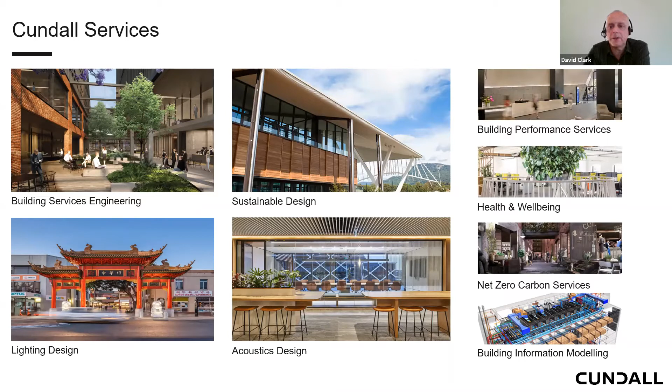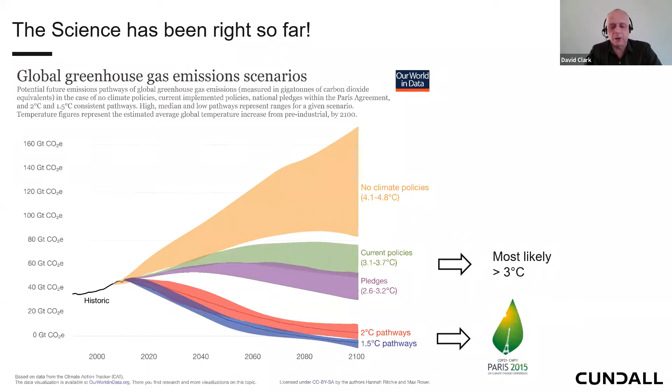So why is getting to zero carbon so important? Well, the science has been predicting where we would find ourselves for years. And while many have ignored this, it's been right so far, and there's been no signs really that we're flattening the curve, let alone making the dramatic cuts we need to achieve the Paris targets of 1.5 to 2 degrees C. Without significant change to business as usual, we're going to be sailing over the 3 degrees target in the next 50 years or so, and we're already experiencing what just 1 degree temperature rise looks like.

Most of us attending today are going to see this change during our lifetime, where we keep breaking historical climate records every year, where we're going to see 50-degree temperatures in Australian capital cities on a fairly regular basis. Buildings and communities are going to need to be designed to cope with more extreme temperatures, droughts, bushfires, storms and floods. And what we're seeing as a result of all this is communities are getting very concerned. There's a lot of community action, protests are increasing, and companies' reputations and social license to operate is going to be challenged like never before.

We're seeing investors and shareholders taking action. More and more companies are refusing to invest in fossil fuel projects and calling on boards to take climate action seriously. Many financiers, insurers and consultants have pulled out of their involvement in the Adani coal mine due to both community and investor pressure. This year the world's largest fund manager, BlackRock, said it would make climate change central to investment decisions. Although a lot of these things, words have possibly yet got to be translated into meaningful actions, I think the sentiment is there, and the movement is really starting to take hold.

Organisations around the world have set themselves zero carbon or science-based targets. And many are already significantly on the way to achieving zero carbon well before the 2030 or 2025 targets that they set themselves. And this includes many of Australia's leading property funds.

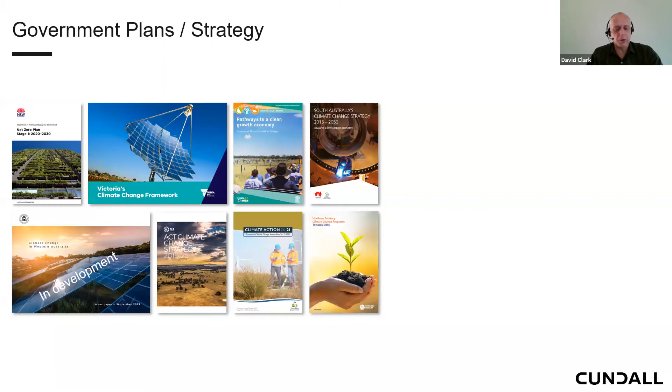All government states and territories in Australia have either committed to net zero carbon by 2050 or are working towards this. Obviously words need to be turned into action, but recognising the issue and then setting a goal is the first step to really tackling a problem. Unfortunately, the federal government has yet to really commit to this zero carbon future, and is still pinning the future prosperity of Australia really on coal and gas.

But as you've seen, there's such sentiment gathering pace with communities, with investors and with companies and leaders in this space, and the energy companies - despite that lack of action or commitment, the future is zero carbon, and we're seeing that more and more on the projects, and some of those will be evidenced today in our case studies.

So what is a zero carbon building? There's lots of definitions floating around, but ultimately it's looking at your scope 1, 2 and 3 emissions. In buildings, it's primarily your building energy. Where do you source your energy from? Taking fossil fuels out, such as gas boilers and so on, looking at your grid electricity and your network losses.

We're seeing more interest in embodied carbon. And then with building operations, things like water, waste and commuting, how you get to and from a building, are also increasingly becoming part of the zero carbon footprint.

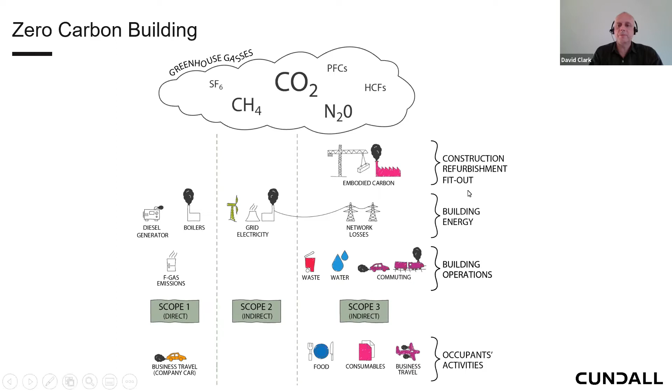So two key trends we're seeing emerging at the moment, in addition to the huge increase in renewable energy, is embodied carbon - placing that emphasis on the carbon footprint right at the start of the building project. We're starting to see this now influence the design of buildings, the specification of materials and the selection of products. And that in turn is influencing the supply chain to deliver lower carbon or zero carbon products for industry to use in buildings.

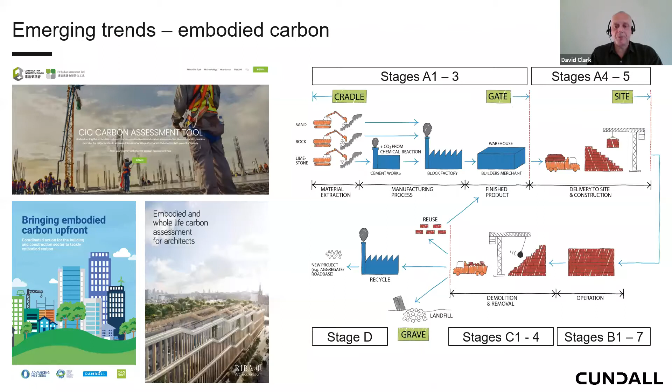There's lots of new tools being developed to make this easier for people to do. An example is the Hong Kong Carbon Assessment Tool, which Cundall wrote for the CIC, and that's been used on over 200 projects so far in the less than 12 months since that's been available.

Another key trend we're seeing is the electrification of buildings. What we're talking about primarily here is the shifting away from gas boilers to provide space heating and hot water, and moving to more electric heat pump solutions, which can then be powered by renewables.

Also, and this is a challenge particularly in retail at the moment, the shift from gas cooktops to induction cooktops. We're seeing this on a number of residential projects, and we're starting to see it more and more in major commercial kitchens, because induction cooktops are cleaner, they're safer, they put less pollutants into the kitchen area, and they put less heat into the space. So they just create more comfortable spaces.

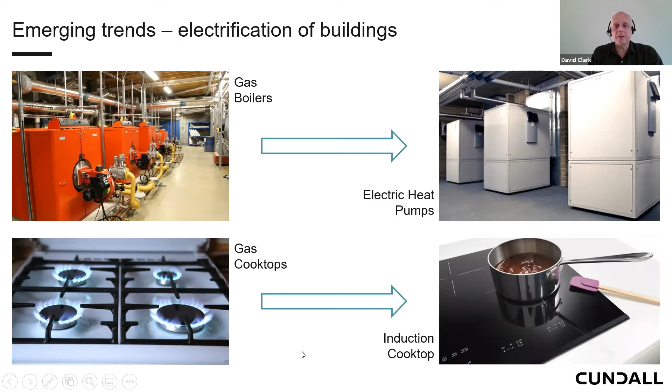This is now being recognised in the new Green Star tool. So for those of you that aren't aware, there's a new Green Star buildings rating tool coming out. It's been the biggest overhaul of the tool since it first came out 17 years ago. And one of the key planks of that tool is around net zero carbon.

When it comes out at the end of October, all 6-star buildings will need to be net zero carbon in operation. Then from any buildings registering after 2023, a 5-star building needs to be net zero. And if you register after 2026, all Green Star rated buildings will need to be net zero carbon in operation. This is in accordance with the Green Building Council's zero carbon pathway.

Zero carbon within the new tool is covered in a number of ways: the upfront carbon emissions, which is the embodied carbon - you've got to be highly efficient in your energy consumption. You can't use fossil fuels in the building. So if you want a 6-star building under the new tool, you won't be able to put natural gas for heating and cooking and domestic hot water.

All the electricity needs to come from renewable sources, either on-site or off-site, and then looking at other carbon sources and how those are dealt with and how those are offset. So we're starting to see this real shift now in how we design buildings and the level of ambition that you need to deliver Green Star buildings.

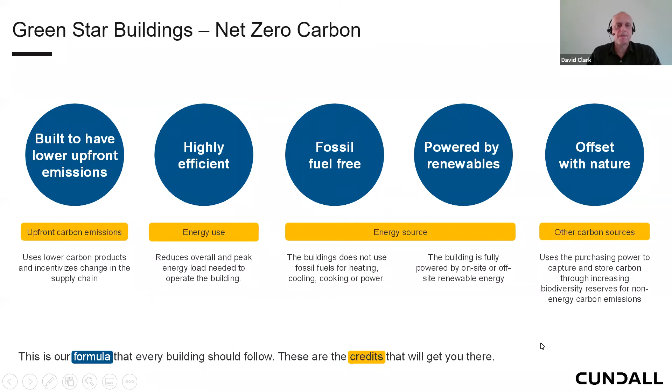So that's a brief introduction to zero carbon and the topic we're going to be talking about today. Now it gives me great pleasure to introduce today's speakers, who will present case studies of zero carbon projects covering new and existing buildings and a wide range of sectors. We've got education, retail, office, residential and mixed use projects covered today.

David Collins leads our Brisbane office, and will talk about the Sustainable Building Research Centre at the University of Wollongong, which is a zero carbon building and Australia's first and currently only Living Building Challenge certified project. He'll be followed by Andrew Thompson, who heads up the sustainability team in Melbourne, and will present on Frasers Property Burwood Brickworks, which is set to become the second Living Building Challenge project.

And is also zero carbon. Julian Bott is a director based in Sydney, and will discuss Stockland's M Park Building A, which is a new office building aiming to be certified carbon neutral, and which was also a pilot project informing the development of the new Green Star tool.

Oliver Grimaldi heads our Perth office and will present on Montreal Commons, a residential project in Fremantle which uses the One Planet framework to set a wide range of sustainability goals, including zero carbon. Cayman McCabe, a director in Melbourne, will present on Younghusband Woolstores, a mixed-use redevelopment of an existing heritage building, showing that zero carbon isn't just confined to new buildings. And Madeline Janash, also based in Perth, will provide an overview of the government's Climate Active Carbon Neutral certification scheme, which can be used for buildings, precincts, products, and organisations.

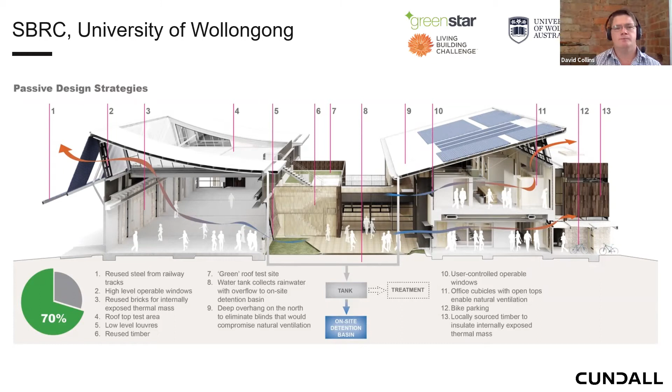Passive strategies were implemented around the building to reduce heat loads and allow natural ventilation, including ventilated openings at high levels that are occupant controlled, and good shading, particularly on the north, which also eliminated the need for blinds and helped daylighting. One of my favourite elements is that the office cubicles, provided for security and visual privacy, have an open top. Not great from an acoustic privacy point of view, but that wasn't something we felt was needed for this project. The open top allows natural ventilation to continue even into a small office cubicle. Appropriate use of materials was also applied throughout to ensure lower thermal loads.

Looking at energy use on site, lighting is very efficient, but heating and cooling systems are still used when needed - we still need to heat and cool occasionally. Hydronic in-slab floor heating has been used, along with ground-sourced heat pumps with user-controlled vents. We looked at the best efficiency systems we could use, and made sure occupants know how to control that space effectively.

Then it comes down to the energy generation on site. The building includes a 160 kilowatt solar system made up of different types of solar systems. As I mentioned, it's really a teaching space, and all these systems are metered and monitored separately to allow students to look at the energy data and compare the different systems.

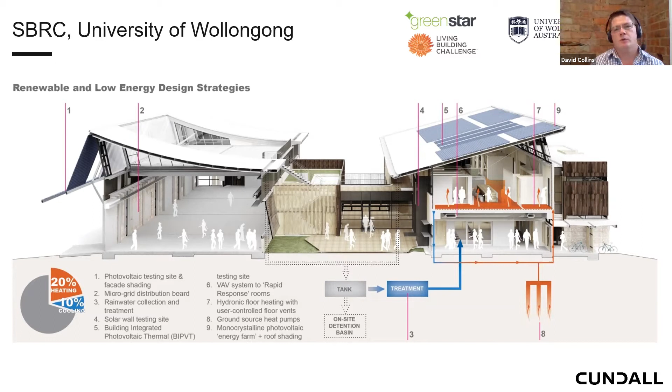We have a main monocrystalline energy farm on the big piece of roof on the right. There's also building integrated photovoltaics in the skylight, allowing both energy generation and the skylight function. There are facade shading elements with a dual purpose of generating electricity and shading the building, plus a solar wall, so students can research what different orientations and directions of solar panels can do for generation.

The building has been operating for a fair few years now, and happily it's been achieving net zero energy throughout that time. For any energy modelers listening, one of the big things with a university type building is understanding the load. A lot of modeling was done to try and predict the energy loads, and happily our safety factors were in the right magnitude—we've been 15% under those predictions throughout generation, which has been great.

The hard thing to predict is the different amount of consumption in different months. We got a fair balance working there, and it turned out successfully. Energy generation has been fairly well where we expected it to be.

Obviously it's fairly easy to predict solar generation, and happily nearly every month, bar a few very minor ones, we've generated more electricity on site than the building has used. The rest has been exported to the university campus—actually about 40% of the generation is being exported at the moment.

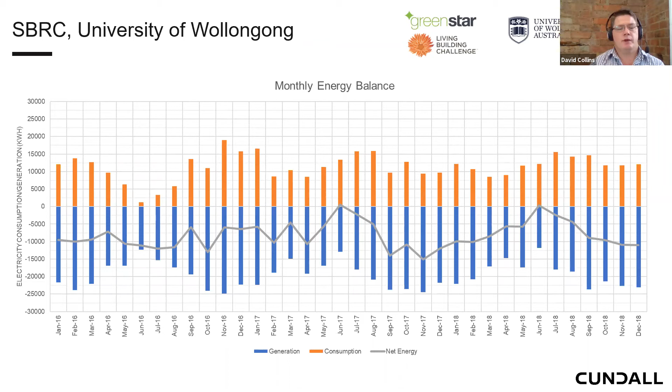That's just a summary of one of Australia's first carbon neutral buildings, a very proud project of Cundall's, and I'm sure of the rest of the project team. I'm going to hand over to Andrew Thompson now, who's going to talk about the Burwood Brickworks project, which is also aiming to be the second living building in Australia. Thank you.

Fantastic, thanks Dave. It's my great pleasure to talk to you today about the Burwood Brickworks, a Frasers Property retail centre in the middle ring eastern suburbs of Melbourne, designed by NH Architecture. It's approximately 13,000 square metres of leasable area, anchored with a Woolworths supermarket, Dan Murphy's bottle shop, cinema, childcare centre, medical centre, and about 40 specialist retailers.

As you can see in the image, the small matter of a rooftop urban farm is one of the more notable features of the building, and a fantastic place to visit if you ever get the chance. There's a restaurant up there as well, so you can sample all the produce.

The brief we were given on this project was very easy to say, slightly tougher to deliver: to produce the world's most sustainable retail centre, if not the world's most sustainable building. To demonstrate those credentials, as David Collins mentioned at the start, this is hopefully going to become the second Living Building Challenge certified project in Australia sometime in 2021.

It's also going to be a 6-star certified Green Star building, and it's of course located within a 6-star certified Green Star community as well. So all of the labels are there to certify what was done.

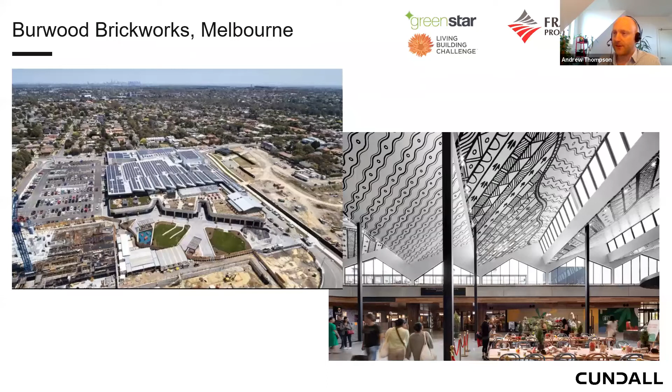Now they can buy into the power purchasing agreement. However, if they choose not to - they currently all do - but if any tenants were to choose to buy their own power, Frasers have additionally committed to still offset all of their emissions irrespective of where their tenants source the power. So irrespective of what happens in future in terms of energy contracts, all of the power will continue to be offset.

Now, as we mentioned, embodied carbon is becoming ever more important. As buildings get more efficient, more and more of our carbon gets associated with what's trapped in the bricks and the steel and the concrete that go in initially. So as part of Living Building Challenge, this project will offset all of those emissions associated with the materials. That's done through carbon offsetting approved by the International Living Future Institute, so it's highly credible offsetting.

But as with any kind of offsetting, you want to drive down the amount you have to offset from the start, and there's a series of fantastic initiatives in this project to do that. First of all, 67% of the materials budget was spent within Australia, which is not standard for a retail centre. There were some items that simply couldn't be practically sourced within Australia, but 67% of all materials were sourced locally to reduce the carbon emissions of transportation.

There are, of course, lots of recycled content in there in terms of Portland cement replacement, etc. There's also replacement of materials with less carbon intensive ones, such as using timber where possible instead of steel and concrete. But where it really got into some great stories was where it used salvage materials.

There was a requirement to use approximately 30 salvage materials, but they actually installed 87 different types. Those range from some things with great stories attached to them, like the bricks. It is a brickworks - Frasers actually managed to track down bricks that came from this very site, including, I believe, some from the 1956 Melbourne Olympics, which they managed to get hold of. Those have all been put back in, and some stories have been added to that. You can see some of the elements added to those bricks, and that's a feature wall at the centre now.

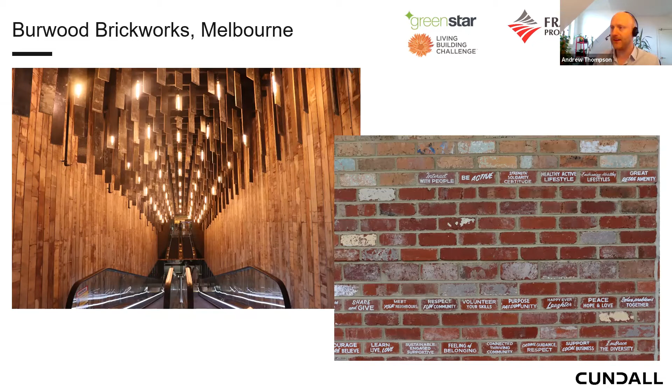We seem to have lost Julian at the critical moment. Sorry, I had an internet connection issue. Thank you, Dave and Andrew.

So, on to Stockland M Park. This is a new office development by Stockland, the first of four buildings located in Macquarie Park. It's been designed and tendered, with the award to be announced shortly, and should be constructed by early 2022. It's designed by Danish architects 3XN, with a strong focus on passive design and an optimised facade compliant with the new NCC 2019.

Our role has been ESD consultant for the design stage, covering Green Star, NABERS, and the carbon neutral strategy. Stockland has taken the initiative to design this building to be carbon neutral now as part of their ongoing commitment, to show it's feasible given that the building systems will be operational long beyond when Stockland's committing to those targets. The building will be finished in 2022, but all the systems will operate for many years beyond that. I believe the team has delivered all of that within the constraints of the project overall.

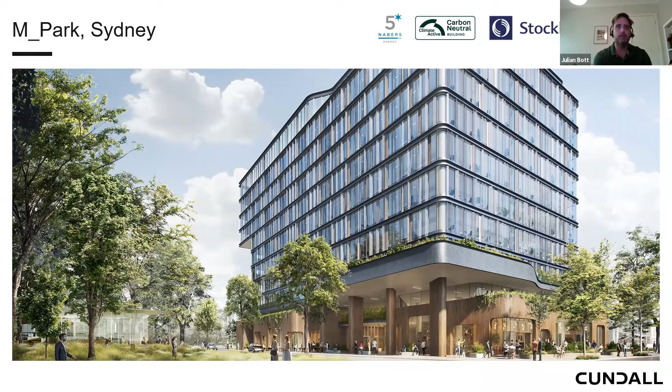Key initiatives for the project include participating in the early Green Star Future Focus Early Access Program to test new credits, particularly how designing a carbon neutral, all-electric building can work. It's targeting a 5-star Green Star rating under the existing V1.3 tool and a 5-star NABERS energy commitment agreement, although the building is actually designed to be capable of 5.5 stars.

It's a fossil-free, all-electric building, meaning it has no gas main, and all systems that would have been on gas are now all electric. The gas boilers and domestic hot water are replaced by air-sourced heat pumps providing heating and domestic hot water. There's also a large PV system covering most of the available roof space, contributing to on-site renewable energy.

That sets the building up to be all electric, meaning it can be powered by 100% renewable energy. All those elements come together to make the building easily certified as Climate Active carbon neutral, minimising the requirements for ongoing carbon offsets, limiting them to things you can't easily address, such as water, waste, and refrigerants. Those will be offset, making the building carbon neutral overall.

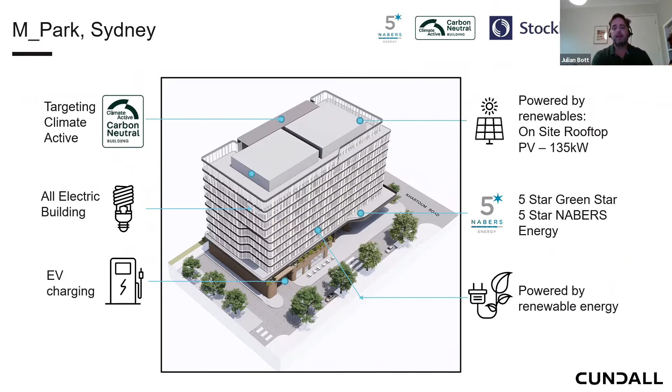All of that has been pulled together and delivered and tendered within the tolerances of the building requirements and brief—a great outcome to drive the industry forward as a leading example of what we can be doing now, accelerating the transition to carbon neutral operation. The building will be finished in 2022 and should be a leading example of how an office building can be designed and operated as carbon neutral.

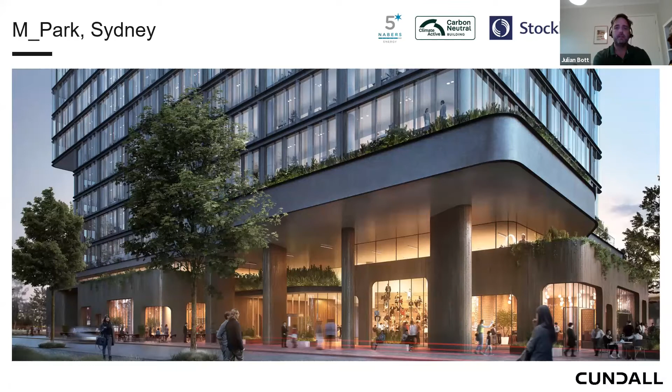Good afternoon to everyone dialing in from across Australia and across the world, from me in Perth, Western Australia. From an office building to a residential building, I'm really pleased to be talking about this one: Montreal Commons in Fremantle, just south of Perth. It's a multi-residential apartment building being developed in the Knutsford precinct, one of three lots on the precinct, and the way it's sharing its utilities and community groups makes it particularly unique and quite encouraging.

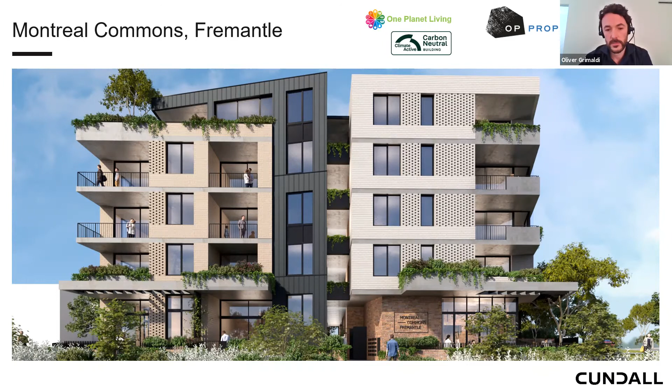The building is targeting carbon neutral status and also formal One Planet Living recognition. I'm pleased to say I think this project will be a bit of a game changer in the industry, in fact.

So it is targeting One Planet Living. Typically, a lot of these One Planet Living buildings, because there's 10 principles, may be strong in one or two of them, but I'd suggest that this building is fairly strong across all 10, particularly the zero carbon energy principle.

We've been liaising with Bioregional Australia and have had encouraging feedback from them. The One Planet Living recognition will include ongoing annual reviews to ensure the publicly released One Planet Action Plan is actually implemented for its occupants.

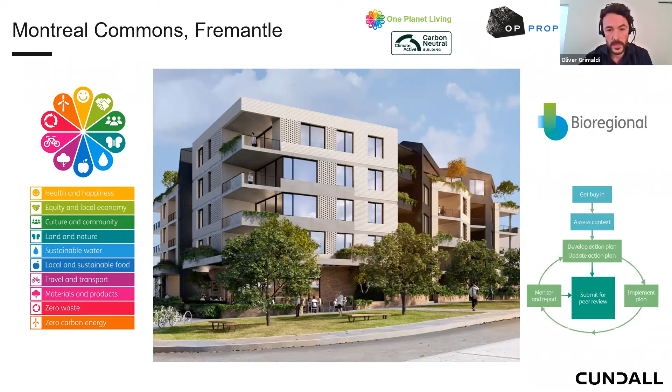So what makes this building particularly unique and special? Well, a fairly common theme at the moment, it's an all-electric building. There is no gas to the building. There are 75 kilowatts of developer-funded rooftop solar PV. But there's also a communal battery, a 670 kilowatt hour communal battery, which sits on lot 2, and that's being shared across the lot.

So the building will be utilizing blockchain technology within an embedded network through Power Ledger's platform. And the whole precinct is estimated to reduce carbon emissions by about 240 tons per year, which equates to about 6 tons per apartment.

On top of that, all of the top-up purchased grid electricity will be certified green power through a local retailer here, Change Energy. And all of this is equating to about a 50% reduction in strata levies for everybody, showing that sustainability is financially feasible and beneficial for everybody.

All the car parks have the possibility to be connected to EV charging car bays. On top of that, there's a communal bore, which you can see at the top there, providing all of the precinct's irrigation water. The pumping of that communal bore is actually powered by the green power, the PV, the battery, etc. So again, you've got carbon neutral or net zero bore water.

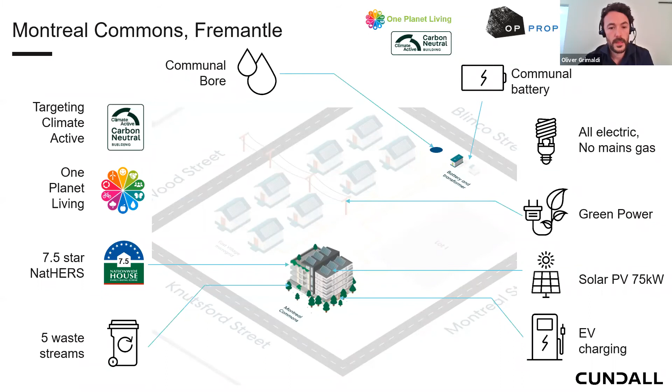And the building is gaining lots of media coverage. There are media outlets across the world and within Australia. I think even Russia and Korea are covering this building. So as I say, a real game changer for our industry, and I'm glad I got to talk about it today. So that's it from me.

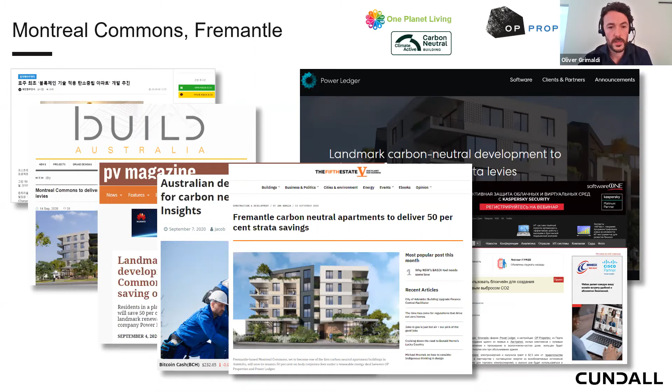House, but I'm presenting on... Oh, sorry, I'm muted. Nope. I'm presenting on the Younghusband project, which is, I suppose, a collection of buildings centered around a wool store.

That was built in 1906, so very much part of Australia's history, although it's actually not on the Victorian Heritage Register. It's only on the building of significance list as we speak, which came as a bit of a surprise to the development team. It's located about 20 minutes from the airport and about 2.5 kilometers from the Melbourne CBD. Importantly, it's also about 5 to 10 minutes away from 2 rail stations, and will be about 800 meters away from the new metro station at Arden once it's built.

The background of this is that Impact Investment Group, a B Corp certified company, acquired the site after a failed attempt by a previous developer to essentially build high-rise residential, keeping the shell of the original building with little other retention of it.

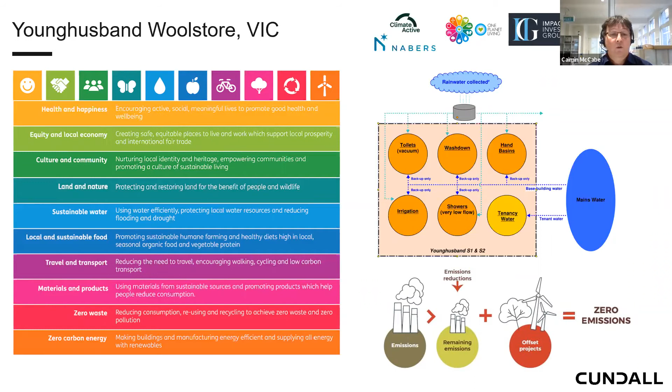So that's where it's going. Hopefully it will get delivered and achieve its aspirations, but it did demonstrate the pathway towards taking an existing building and achieving that net zero outcome. I'll leave it there and pass over to Madlen, who will talk to you about Climate Active.

Thank you, Caimin. So I will say a few words about the Climate Active Carbon Neutral certifications. Some of you probably know the NCOS scheme administered by the Australian government, and Climate Active is a rebranded version of this.

It comes as a certification, but it's also a standard, and the standard can be used by everyone. It's also free, available on the internet. If you follow the standard, you can then have a formal certification followed through.

Both the standard and the certification are available for buildings, and we've seen some examples in the presentation earlier today. You can also go wider than that and certify a whole precinct. But then Climate Active goes beyond this, certifying also organizations, events, products and services.

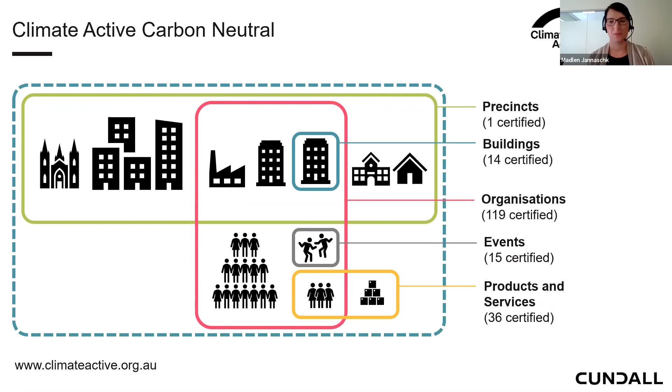This slide on one hand shows how to certify with Climate Active, but it also is a summary of what we talked about before. So what you see in that black box there is really a summary of how to go carbon neutral and how to become net zero.

There are 3 steps. Firstly, calculating the carbon footprint. You can only reduce and minimize what you know, so calculation is very important, and ideally following a set standard or guidance is recommended.

I should also mention that Climate Active only looks at operational emissions and real data emissions, so basically based on actual data on actual energy consumption. But that shouldn't stop you from calculating a footprint for a building that's planned or in design phase, because you can also calculate a footprint through modeling or through life cycle assessments.

Second step then is the reduction of the carbon footprint, so trying to get this as low as possible, and we've seen again a lot of examples how to do that in the presentation today. I think for buildings I can summarize the major initiatives to do that under 4 different measures.

Firstly would be the reduction of the demand in the first place, that's mainly through passive design. Secondly, efficiency, trying to get the HVAC systems, electricity systems, all the building services as efficient as possible. Then switching fuel, so no gas in the building. And then lastly, having as many on-site renewable energy as possible.

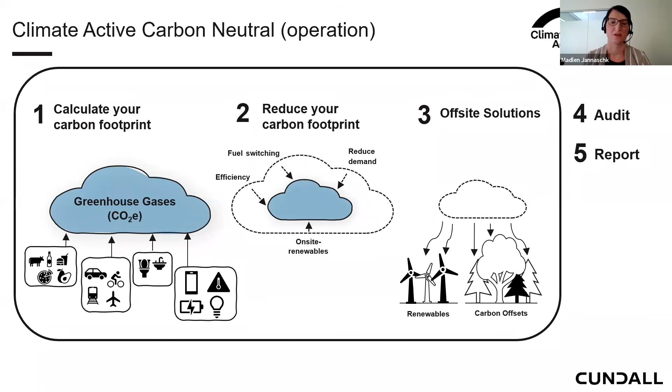And just as a final slide, just a few examples. We've seen quite a few buildings that target this. We also work on various buildings and precincts. We work with a few offices from Australian Architects Declare, who've committed to go carbon neutral by the end of this year, and a few other organizations. And also Cundall ourselves, we are Climate Active carbon neutral certified organization in Australia, and we are very, very close to being carbon neutral worldwide.

And on that note, I hand back to David Clark.

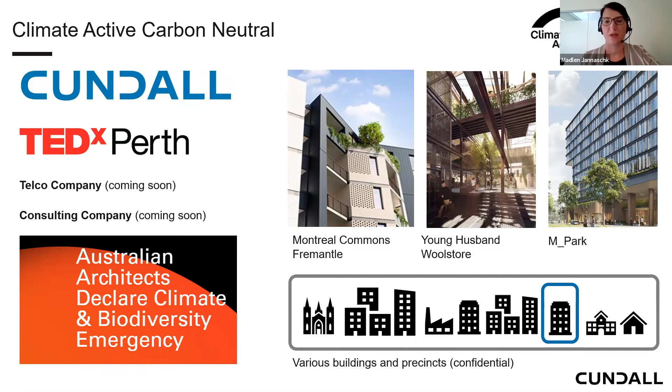Thanks, Madlen. So that concludes the formal part of this webinar. We've heard from 6 speakers on a range of topics. Dave Collins talked to us about the SBRC, the Living Building Challenge project that's been exporting significantly more energy than it's consumed since it opened a few years ago.

Burwood Brickworks, which is another zero carbon net exporter of energy, retail centre. Julian spoke about MParks, Stockland's MPark project, an office building that is going to be carbon neutral certified. Oliver talked about Montreal Commons, which is a very exciting residential project showing some smart thinking, clever ways of looking at how you do renewable energy in residential developments.

Caimin spoke about the Younghusband and what you can do in existing buildings. And then finally, Madlen gave us an overview of the Climate Active carbon neutral certification process. And we're recognized consultants in that for all those different types of certification.

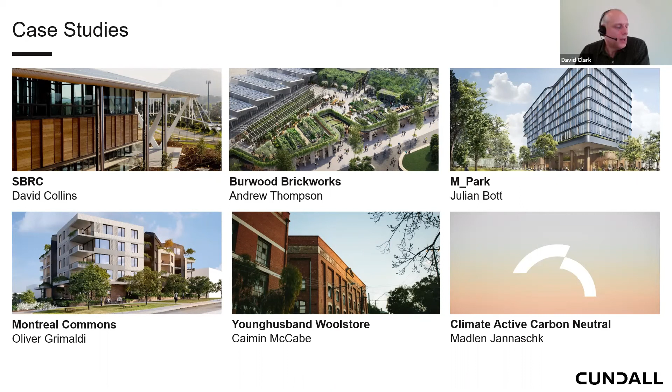So without any further ado, I'm going to go to questions, and we've had some questions come in. Two of them are quite thorny questions, always a difficult one to answer, about the capital cost versus payback period for some of these initiatives. So that's always a fun one to answer. I will open the floor to anybody that's done that analysis recently for the project to give a response.

I might jump in for Burwood Brickworks, not because I have an analysis in front of me, but that project, I was told on Friday that the approximate capital overcost is 10%, which obviously when you look at the world of retail and thin margins and so on, 10% seems like a lot, but equally it is interesting to look at it and consider that if every building was designed to Living Building Challenge standards, the theory is that our built environment would be entirely sustainable, if not regenerative. So in a way, we're saying that it's 10% from where we are now to what a sustainable urban environment would look like on a building by building basis.

And that is comparing it to a standard 5-star building rather than business as usual, because 5-star Green Star is what Frasers now considers to be business as usual from their perspective.